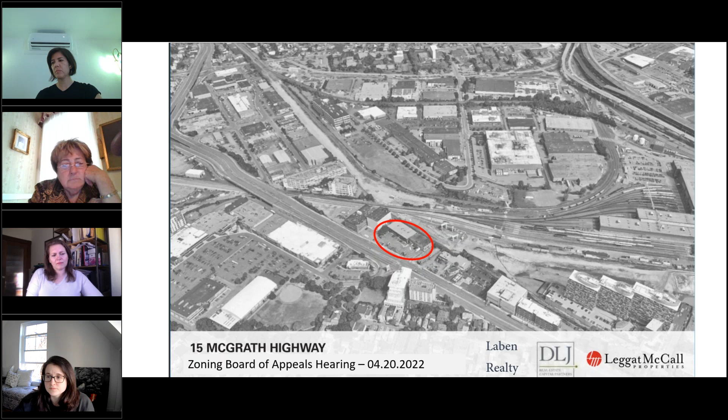Many folks are aware of the site. It's the old site of the Save More Liquor store, which has now moved over to Assembly, and a vacant 2-story office building. The board may remember the building that was being proposed: it's a 9-story lab life science building.

I think of most importance are the activities we've been going through since we got approval from this board for the variances back in April of 2021. We've had a robust public process since then, involving many steps, permits, and approvals. These included our neighborhood meetings right after we received board approval back in April of 2021, and we went through the Urban Design Commission and got their recommendation letter.

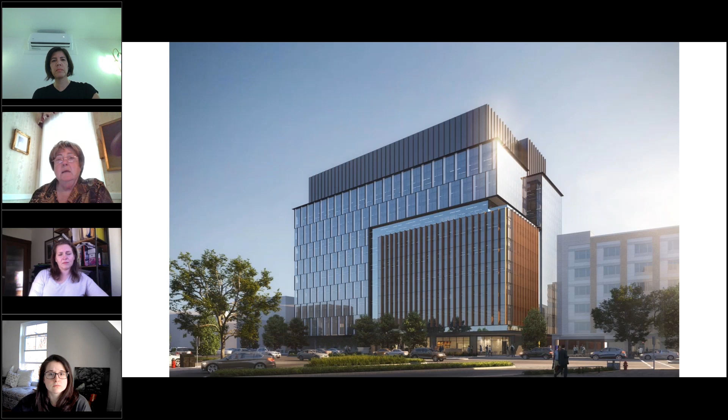Ann Brockelman and Catherine, do you have anything you'd like to ask or comment on? No? Is that a no? Say no or shake your head so I'll know what's happening. All right, so no.

Thank you. All right, so without further ado, I think it's reasonable - I think it's a good question, Ann, about the 6 months, so they're not back here again if everything goes well. It just seems that more and more things are opening up, even better outside, so maybe things start moving along. It's been a very hard couple of years for all the developers and construction with product, and Madam-

Madam Chair, hello. I don't want to interrupt, but while this is a fairly straightforward case, public comment is necessary before the board votes. Thank you.

Thank you, Charlotte. At this time, so the applicant's made his choice, we asked a couple of questions, we will, as protocol, open it up to the public. Charlotte, would you help us with that? Is anybody from the public here? Yes, Madam Chair, I would be happy to. Polly Pook has their hand raised. Polly, you are unmuted.

Hello, Polly. Hi, thank you so much. I just wanted - this may be inappropriate in this context, but I did want to let you know, and I also speak for our building management - I'm from Brick Bottom Condominiums, and the planning board had asked the owners at 15 McGrath to work with us regarding shadows that were cast and resultant snow and ice problems caused by their building. I just wanted to let you know that Mike did reach out to us, and we were able to find a very successful and useful mitigation strategy. Providing that they follow through on that, we have no further objection to the current massing.

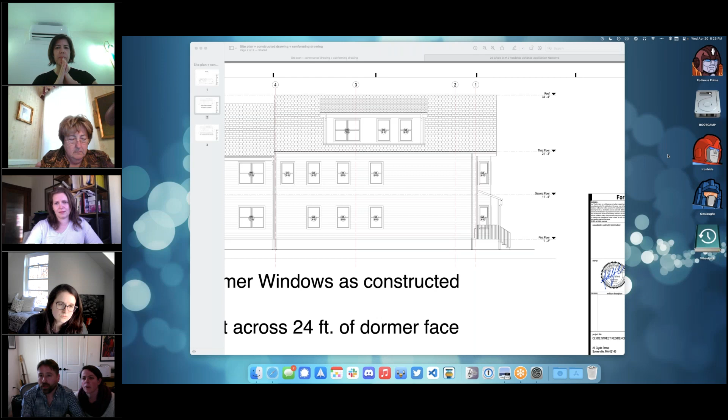Showing. Bear with me, please. Oh gosh. All right, can you see our screen now? Not yet, no, not showing anything. How do... Oh hey, there we go. How about now? Yes, okay, cool.

Oh, we don't have that. Not the first time I've seen that. Yeah, we don't have that. That's why we're confused, we do not have that drawing. There's this drawing, we don't have that. This is what you have. This is what we have, this is today, what you have.

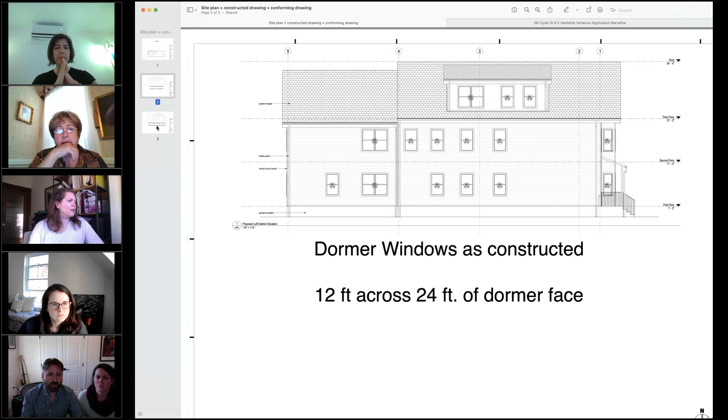Yeah, this is today's condition. And this is as it should have been. A202 is what you accepted.

This is Raisa speaking. If I can just clarify, the plans in front of you are not the plans that were submitted for the application. This was submitted for the previous application that was withdrawn. I just wanted to clarify.

I apologize. What are you saying? The ones we have here that are the A200s, what's the date here? In our packet there are two A202 pages because they're the same page, but one is the first version and one is the second version, so it's a little confusing to refer to them.

We only got one set of plans. Interesting. Okay, well I'm sorry about that. I was pretty sure I had resubmitted all of this, including this version of it, to you. So I apologize for that. Does it make it a little more clear though to see this third page, which you should have had but obviously don't, is how it is meant to have been constructed?

Can you go back up to the second page? That's actually the one we don't have. Oh yeah, here you go. So here's how it is today.

And what is the overall width of the dormer as constructed? Is it the same width in placement? So it's really the fenestration, the window opening and sizing. That's right. Yes, that's it in a nutshell.

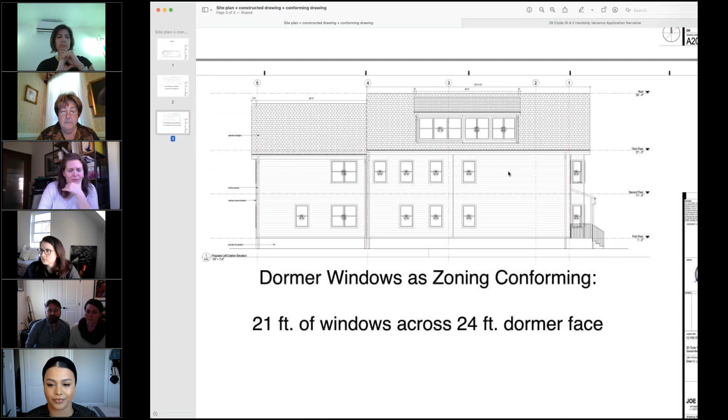Yes. Okay, now they go forward and build, and we end up with this, but the way the zoning is written, it was supposed to be the larger windows, which we have in our packet. Correct. Would you show us the next one, Mr. Burns — that A202, the one that's the different date. There you go.

Yes, should be there now. Yep, the larger windows. Now that's it.

So this is what's coming to us tonight, that technically, unless we give you a variance, you'd have to build these windows, right? Everybody on board with this? You architects too, the lawyer here?

So, in your hardship, as you're saying, which I have all in your report here. Okay, so we all understand now what we're looking at? Anybody on the board want more clarification? Ann

Brockelman. So, yes, just to make sure, the previous design did not require any variance because it was conforming. It was by right, it just passed zoning as a matter of protocol. But then now it requires a hardship variance because you wouldn't be complying.

You have too few windows, and I always want to bring the technical dimensions back to the spirit of the zoning ordinance, which is we just don't want people to pop up dormers for closets or storage, for example. We don't want blind, opaque dormers. That's kind of like the spirit of being neighborhoody and scale, have a sense of scale, and it's for habitation. That's the spirit of the law. That's why there's a minimum opening requirement, which you fall under by how many feet?

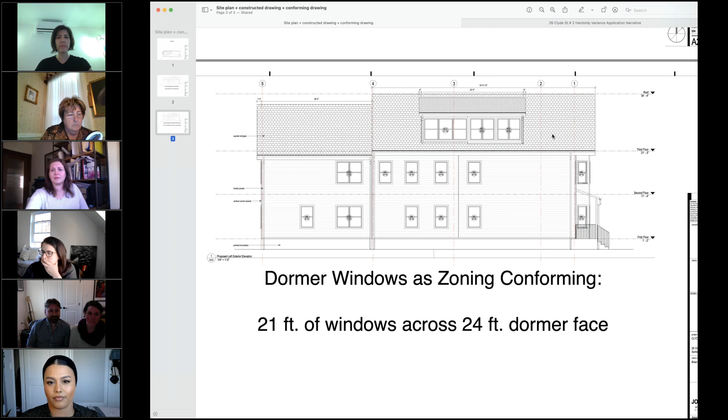Can we go back to what you've built? What has been built? There you go. And just as a matter for record, the drawings - these permit drawings and the zoning before - is it the same architect? I know it's Joe, the architect, in the title block. Yeah, I got both of these from the architect via the builder. So these are the ones that went through all the various processes with the city. I just cut them out of the main plans.

Okay. I don't have a further question, Madam Chair. Okay. So let me, yes, Catherine, please.

Thank you, Madam Chair. I have a slightly different line of questions for the applicant. You said that you both work from home. Can I ask what you both do for work? Sure. I'm an assistant director of communications for the Harvard School of Engineering. I do a lot of media, multimedia production, media relations, press releases, that kind of thing. I'm a manager at Athena Health, which is a healthcare services company.

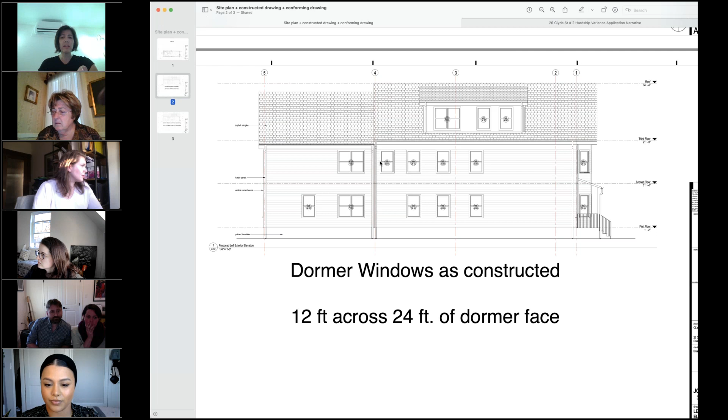So, I mean, that's not going to impact my decision tonight. Obviously, I think it looks fine. I'll just say that my vote is yes. It looks fine in terms of scale, just visually, but I am not very happy about the lack of clarity in what actually is required. So maybe that's between us and staff another time.

I can add, Madam Chair, ISD believes it's approximately 5 feet of window space required that the relief is needed for. The applicant was advised to provide drawings that illustrate the exact amount of relief required. It is up to the discretion of the board to see if the information provided in front of you is sufficient to make a determination on.

But it seems like they are equally confused as to what's required. If they're deficient of 5, you see that panel between the double and the single? That's about 5 feet, right, or 3 and a bit more. Each of these windows is 3 feet. So if they're deficient 5, they connect that. That looks fine, and there's still a lot of opaque space.

But if they are only allowed 36 inches of non-window, then you're going back to the heavily glassy dormer. So I don't think, unless they go back to the architect, we're in agreement of what relief is required and what the zoning says. So that's a bit frustrating, along with the lack of clarity in the report as well.

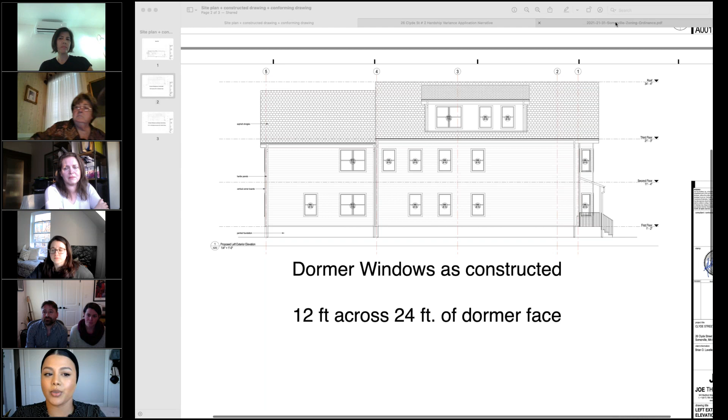Catherine asks Ann or Brysa to redirect her to the zoning ordinance provision. She's confirming she has the right section open - Article 3.1, 13 - and verifying that's correct.

I don't agree with this interpretation that's being presented at all. That's a maximum that it could be. It's not requiring that we have windows and then 36 inches of other space. That's the maximum - you can have less. There is no minimum that is stated.

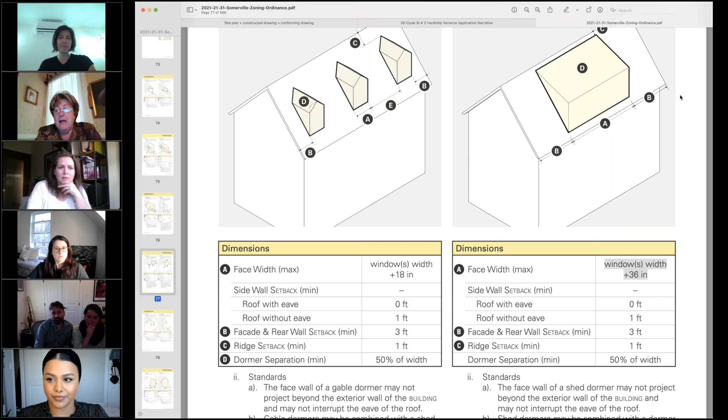Okay, we'll take a pause. We've been hashing this out. They made a brief presentation, we have their paperwork. I'd like to open it to the public to get some feedback from the neighbors, because part of their write-up is also about the staging and how it affects the neighbors. Let's do that if we could.